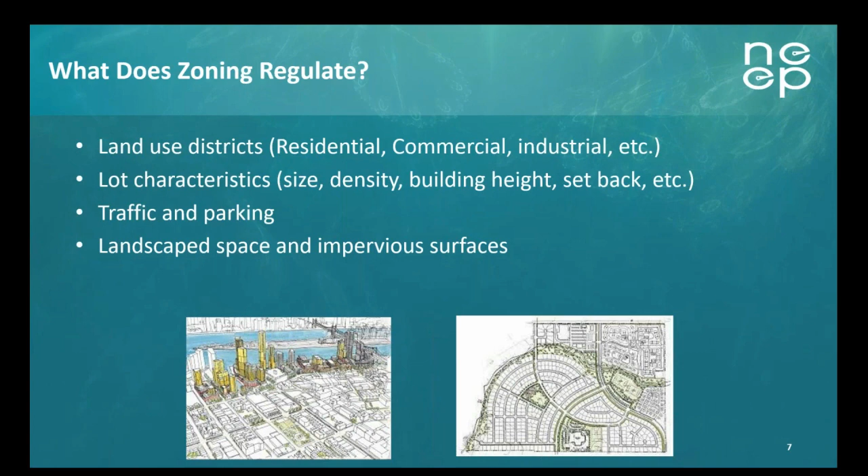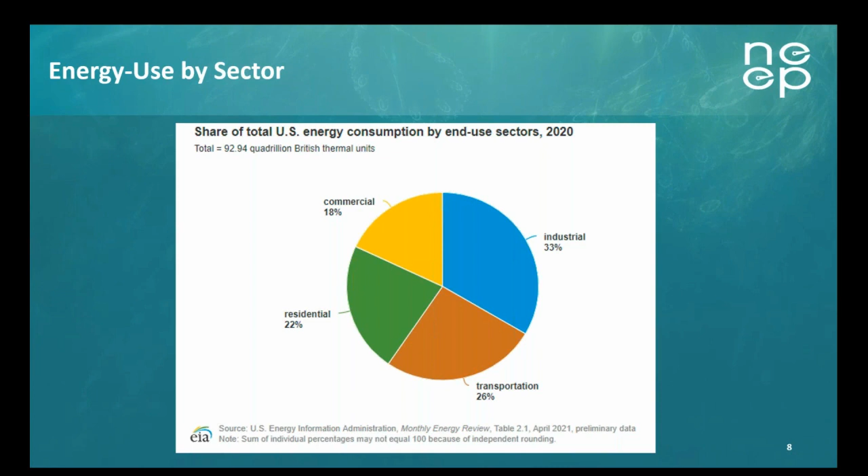So what's the impact of zoning on building energy? Zoning can be used for green space, hardscape, and roof surfaces. In terms of how zoning handles those things, things like urban heat island effect and stormwater management come into play. I'll be getting a little bit more into what urban heat island effect is and how it affects energy as well as people. Next, setback requirements—zoning determines how far the building is set back from the street. In terms of how that affects building energy, building insulation is a factor within the setback, as well as passive solar. The overhang of the roof and how much that counts towards the setback also play a role in the building's energy.

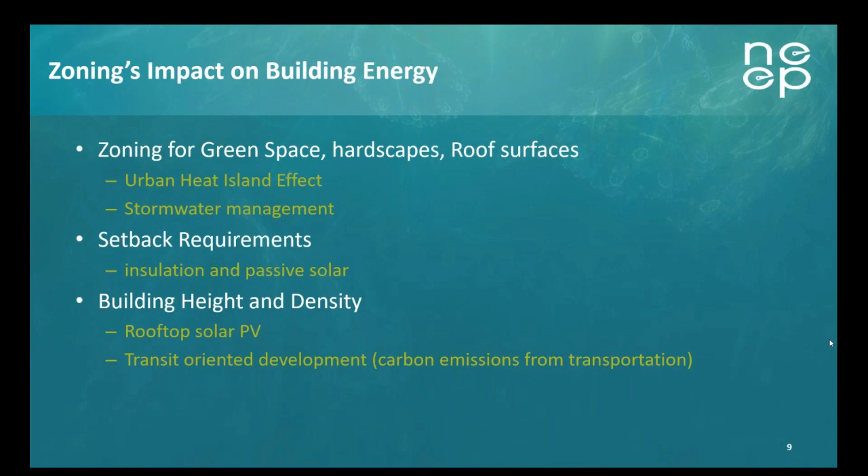And finally, the building height and density. Rooftop solar is a huge consideration for building height. In places where zoning doesn't take solar into consideration, the added height because of solar could come into conflict with what's zoned for that district. And finally, density—a lot of districts are looking at transit-oriented development, focusing development around public transportation and other rights-of-way, and understanding that building at a higher density in those areas can reduce people's use of cars, which contribute to carbon emissions from transportation.

So a little bit more about heat island effect. Heat island effect is urban areas where structures are highly concentrated. There's limited greenery, so there's lots of hardscape and dark surfaces that attract heat, become islands, and can create higher temperatures, which have both an effect on people's health, the temperature of that area, as well as the energy used on things like air conditioning.

In areas where there is a high heat island effect, daytime temperatures can range from 1 to 7 degrees higher during the day, and at nighttime 2 to 5 degrees, and that can be exacerbated in areas where there is a higher level of heat island. So thinking of cities like New York and Houston, where there is a higher degree of hardscape, those temperatures can be far higher during daytime hours.

Heat island effects contribute greatly to increased energy consumption through the use of higher needs for air conditioning, which can lead to things like rolling blackouts and brownouts. Cities that are often experiencing acute heat island effects feel that strain on the grid because of more usage of air conditioning.

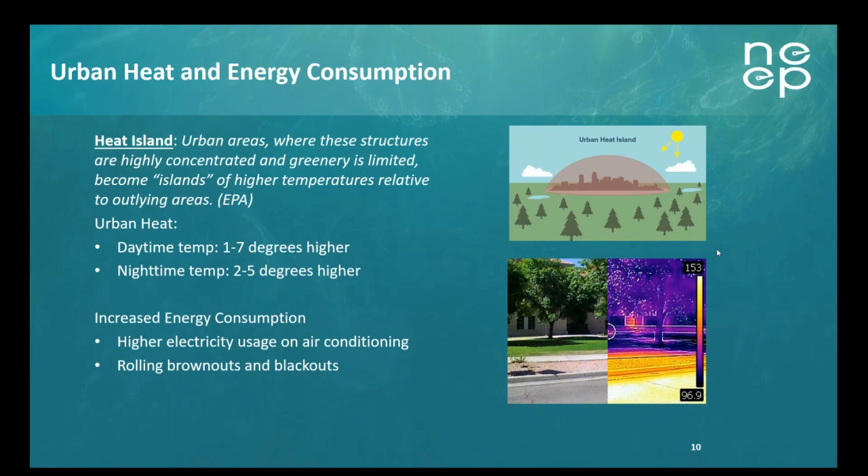Looking at the effect that heat island effects have on people, specifically on low-income communities where older homes are poorly insulated and have weak electrical systems, the added need for air conditioning, having to run it all day, could have a huge strain on those houses. Because they're poorly insulated, they're not holding on to that cool air, and it's causing utility bills to be a lot higher for low-income communities, which puts a strain on them and leads to a higher energy burden.

Next, elderly people and people with health issues are at a higher risk for heat strokes and respiratory distress because of heat island effect. They aren't able to get the same level of comfort and safety in cities where there's higher heat island effect.

And finally, poor air quality, which again has an effect on vulnerable and elderly people. Research has found that redlined areas often have less trees and higher temperatures, and there's a higher ratio of hardscape to green space. So we're talking about redline areas, areas of the city that have been designated and mapped so that specific populations live in one area versus another. I won't get into a lot of that, but it's a consideration, and a lot of research has been done around how redline neighborhoods often coincide with areas that experience higher levels of heat island effect.

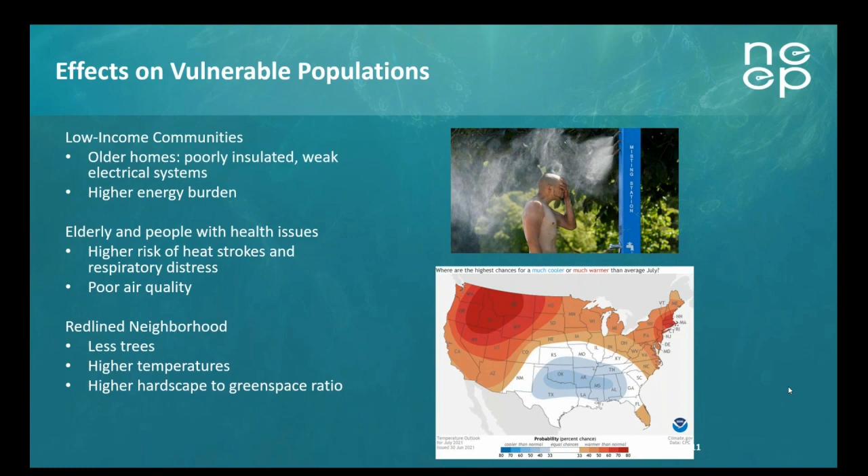Spending a little time providing a few examples of how different cities and municipalities have used zoning to address building energy. Looking at Somerville, they recently did an overhaul of their zoning code and incorporated building energy language into it. One aspect of that was the green score, which uses a similar structure and language as the Seattle Ordinance. The green score is a performance-based environmental landscaping standard that uses a weighted point system that incentivizes different landscape and site design elements. These elements aren't directly connected to energy, but do touch upon it.

The green score touches upon things like reducing stormwater runoff, improving urban air quality, mitigating urban heat island effect and the effect it has on building energy usage, as well as improving the well-being of residents and visitors. In addition to this zoning overhaul, Somerville is also committed to adopting a zero energy stretch code, which is currently being developed in Massachusetts. This is a way in which the zoning in Somerville is trying to work in concert with updates to the building code around energy and really prioritizing that.

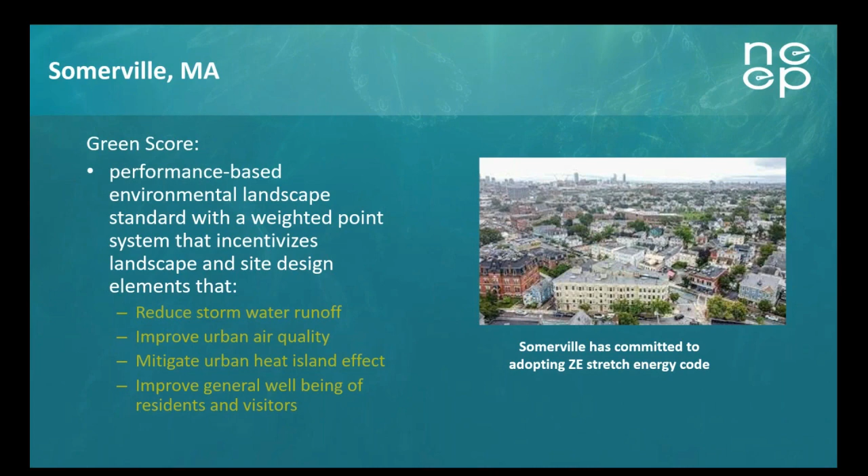Next, Denver. I know Katrina, who will be going after me, will be talking more about this, so I'll just briefly touch upon the Denver Green Building Ordinance and she can go into more depth. In Denver, they passed an ordinance that offers flexible pathways for compliance for green buildings, for new buildings over 25,000 square feet and additions 50,000 square feet and up. One of the requirements is a cool roof.

A roof that reflects sunlight is considered a cool roof, so it's not absorbing that sunlight, which is part of the heat island effect I talked about earlier. It reflects sunlight, which reduces the building's energy load.

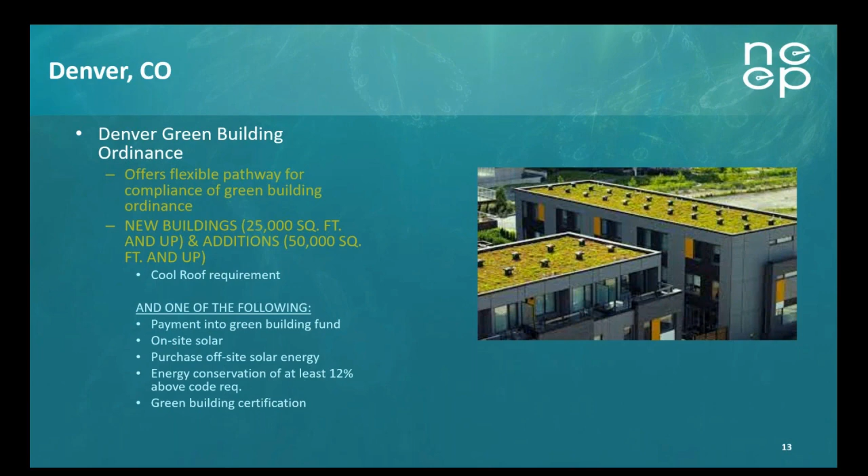In addition to that cool roof requirement, buildings can also comply by following one of the pathways, including payments into a green building fund, on-site solar, purchasing off-site solar energy, reducing or providing energy conservation of at least 12% above code, as well as getting a green building certification like LEED or Passive House.

Next slide. So a few considerations for municipalities that are looking at their zoning and want to try to implement strategies for their zoning to better address building energy.

Think about allowing for building orientation exemptions to maximize daylighting, especially in winter times, ensuring that there is enough daylight getting into the building to lessen the load on lighting.

Promoting covered parking in commercial districts to reduce heat island effect, and in addition to having covered parking, potentially using that covered parking for canopy solar.

Setting a minimum solar reflectance index, or SRI, for the roofs in commercial and industrial districts. Going back to the Denver example, the cool roofs, that's kind of what SRI is for, the solar reflectance index.

Finally, exempting overhangs and exterior wall thickness from counting towards the gross square footage. So really, it's looking at the setback and putting exemptions in there, allowing buildings to have thicker insulation and overhangs to better insulate and make the building tighter and more energy efficient.

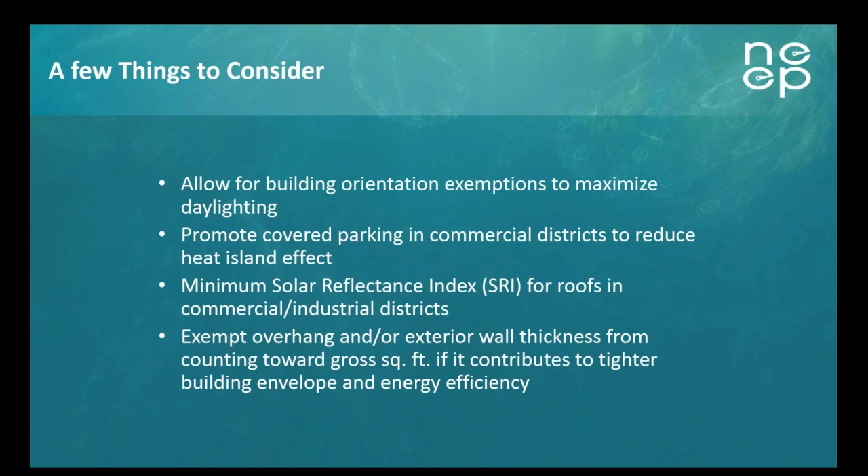I think that is my final slide. So thank you, everybody, and I'm here to answer questions at the end.

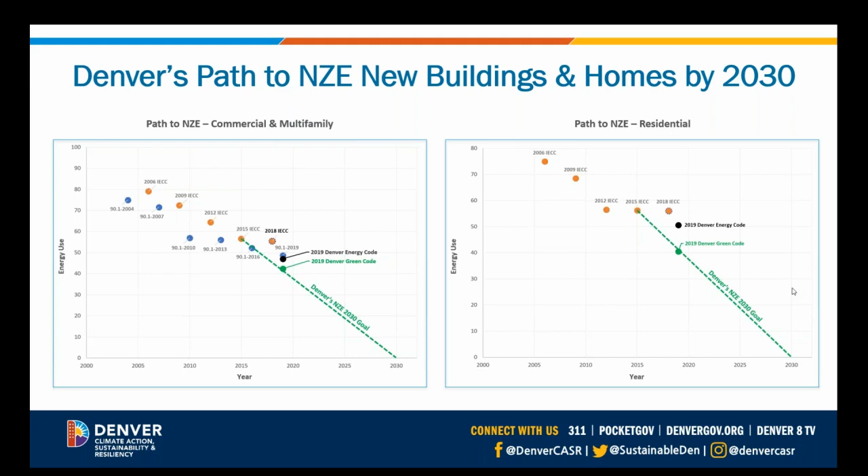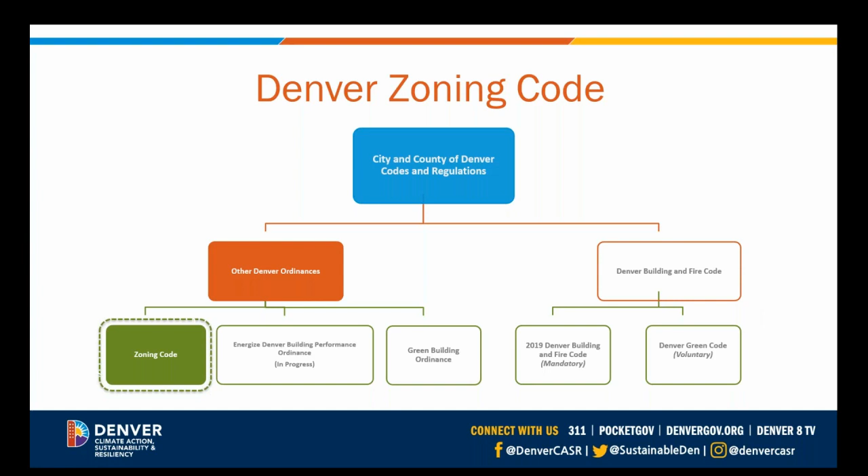So next we'll go into some of what we're starting to consider in the zoning code. Just to center where this is, it's separate from the building code. On the next slide, I'll talk through a bit of what we're really starting to scope in terms of what might be possible in our zoning code.

You heard Kai touch on a bunch of this, but we're looking at things like landscape regulations, which govern what kind of soil volume a tree needs to be given, and what kind of plants need to be planted, because we are in an arid high desert prairie in Denver. That's what comes right up to the mountains, and then the mountains start—they're pretty arid too, but we don't have a lot of water. So how do we make sure people are planting appropriate plants for our climate?

How do we change lot coverage standards, parking requirements? Can we require district energy systems? There's a really cool district energy system being built at our new National Western Center complex.

It's a big complex. The city is collaborating with Colorado State University to run our stock show, but also do lots of agricultural trainings. That whole campus is going to be powered by a waste heat to energy system. They'll be pulling energy from the sewer pipes that run along through the property—it's extra waste heat that was just warming the river after that water was cleaned and dumped back in, and they're converting it into energy on the campus. So how do we get more large developments planning for that kind of district energy system? Some of that sits in zoning, or would sit in zoning.

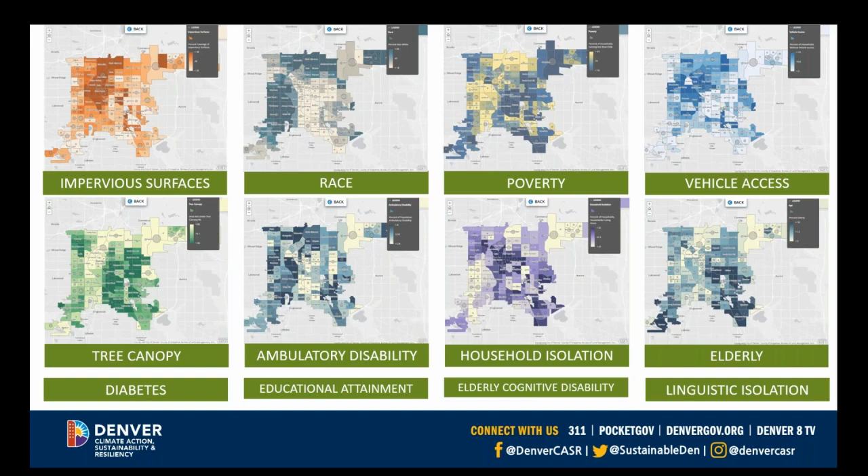And so we know there's a pattern there—if you go to the next slide, you can also see how that same inverted L shows up in our heat vulnerability index. The areas that have the least tree cover, the most people of color, and the most vulnerable populations also have the greatest heat vulnerability.

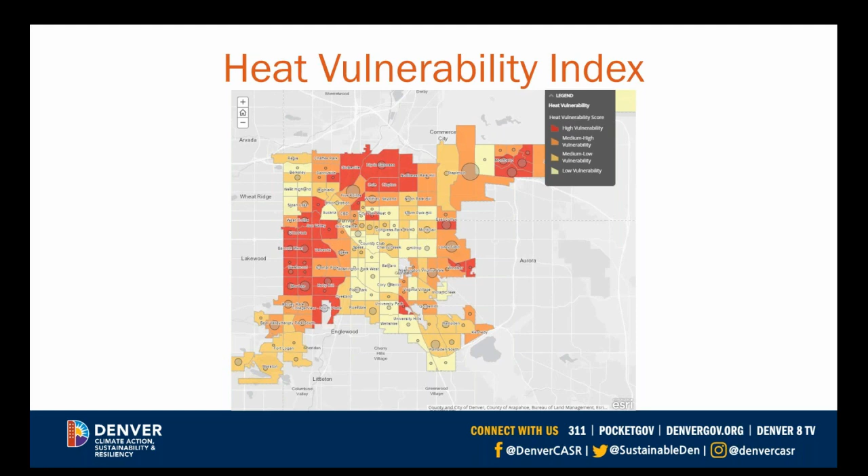So all new developments and all roof replacements are really contributing to the sustainability and resiliency of our city. This was put in place in 2018, so we've got a pretty good track record as it rolls out, with people picking a mix of compliance options across developments citywide. I think the ordinance is working, especially since we add about 2% to our building stock every year—we're growing pretty quickly. As more buildings are built under this ordinance, its impact will grow over time.

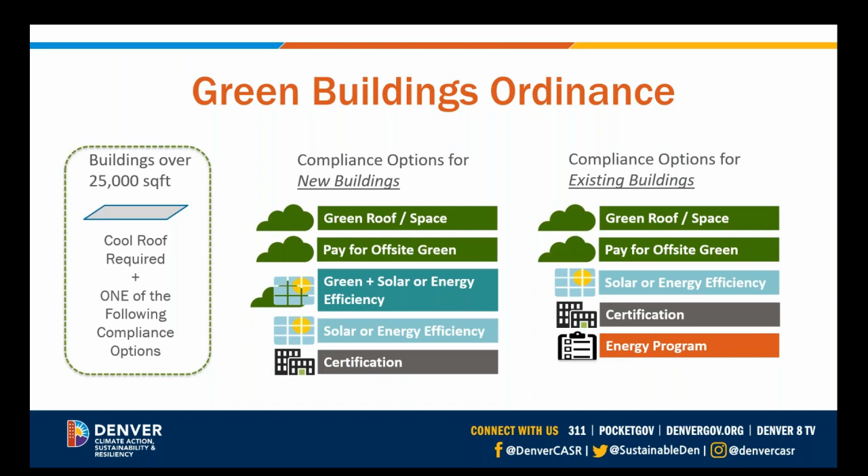Next slide, I'll talk about the Energize Denver task force. This is now returning to existing buildings—that's really the last piece I wanted to cover, because the organizers were interested in how we're starting to contemplate and work on this policy to require higher performance from our existing buildings.

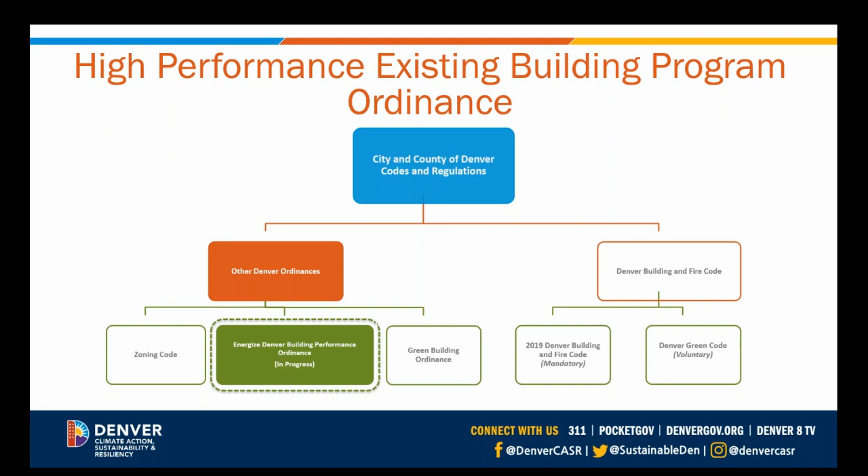If we go to the next slide, we know that 49% of Denver's greenhouse gas emissions come from buildings—commercial and multifamily buildings—and another 15% or so come from homes. So this policy is going to improve the performance of all these existing buildings. The code work I just talked about and the green building ordinance help improve the performance of new buildings, and about half of our building stock will be new by 2050. So let's talk about what we're doing on existing buildings. Next slide.

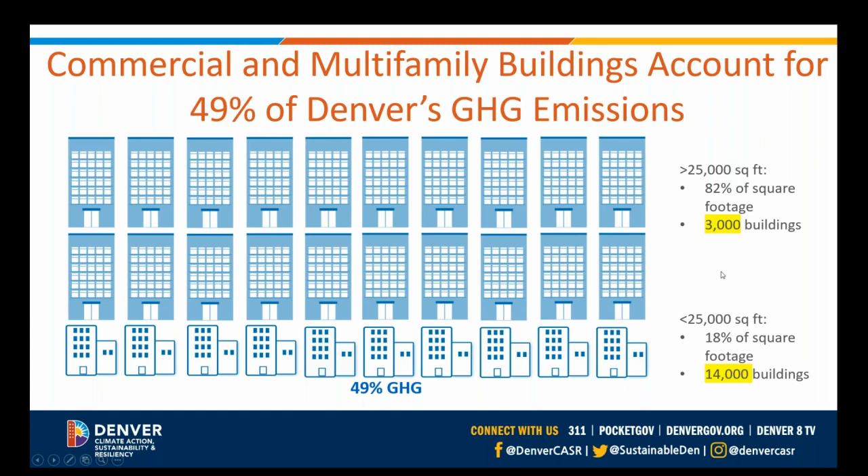We formed the Energized Denver Task Force to help us achieve net zero energy in all of our existing buildings by 2040. On the left you can see the blue electricity carbon emissions, and in yellow the fossil gas or natural gas carbon emissions in 2020 from all our commercial and multifamily buildings. The open bars are really what we charged the task force with figuring out how to meet.

The task force included really diverse stakeholders: folks from across our real estate sector, building owners and managers, hotels, apartments, condos—all our biggest building types—as well as affordable housing providers, nonprofit and tenant representatives, our local utility, oil and gas and energy providers, clean energy advocates, environmental groups, and building energy experts. We challenged those 25 diverse people to come to consensus about how to regulate the open bars.

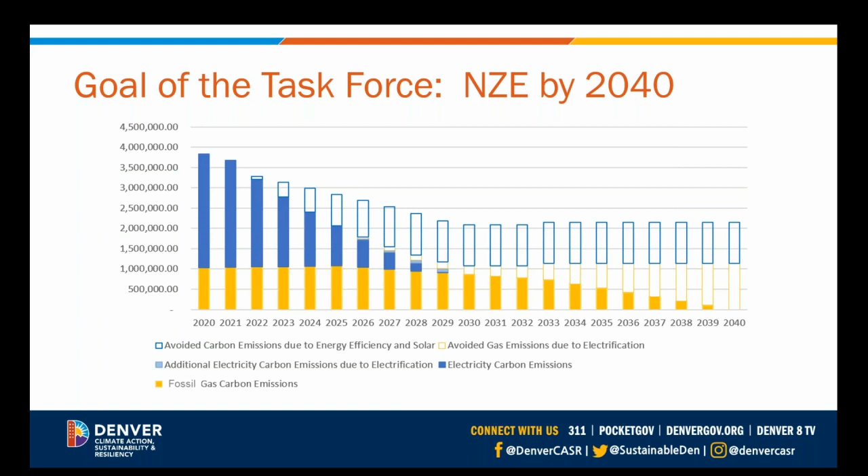How do we require our buildings to be at net zero by 2040? If you go to the next slide, you can see what we charged them with and what they came up with. So what they have recommended to us, we will be bringing an ordinance that reflects this to City Council for their consideration on November 3rd.

What they have recommended to us is that we require a 30% improvement in energy performance for all existing buildings by 2030, and every building will have its own trajectory. Here's an example of how this will work for offices. All offices would have a target energy use intensity of 50, which is how much energy is used per square foot by 2030.

Office A uses a lot more energy today than Office C. It has 100 kBTUs used per square foot every year, and Office C only uses 60. They're much closer to the final target. So every single building will have its own line or trajectory drawn to get to the same final target. They will have binding interim targets in 2024 and 2027, so that no one has to save an unachievable amount in any one year. They have a glide path to that final target.

15% of buildings, and 15% of offices in this case, are already better than that final target. That's what it takes to save 30% across all buildings - everyone has to be as good as that top 15% of buildings today. So this will be one requirement that we'll be bringing to City Council for approval. It will be in committee on November 3rd, hopefully passage through council in November.

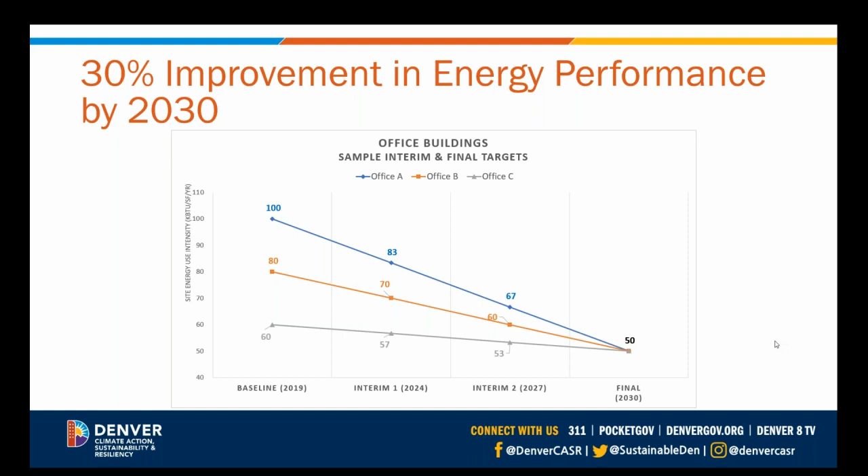The second requirement, which I think was really of interest to this group, is a little more tied - if we go to the next slide, you can see what the task force has recommended regarding renewable heating and cooling. Moving from natural gas space and water heat to electric space and water heat is a critical climate strategy. If we're going to have zero emissions in buildings, we have to stop burning natural gas. And if we're going to have zero emissions as a city, we have to stop burning natural gas in our buildings. Our grid will be 80% renewable in 2030.

Our local utility, Xcel Energy, is required to reach that target. They will be carbon free in 2050. So the grid has capacity to move to renewable heating. We are looking at how we help buildings meet those performance targets you just heard about, and really make sure that all buildings are moving off of gas for space and water heat when it's cost effective, when they're already replacing their systems.

We have a whole renewable heating and cooling plan - you can find that easily if you Google it. It looks at how to electrify all the homes and buildings in Denver and the cost to do that by system type. There's a lot, even in Denver, which is a heating dominated climate - it gets cold here in the winter. It is cost effective and at cost parity or near cost parity to move to a heat pump for space and water heat in most system types, and often to be at or near cost parity today, we do need to keep gas backup for those very coldest days.

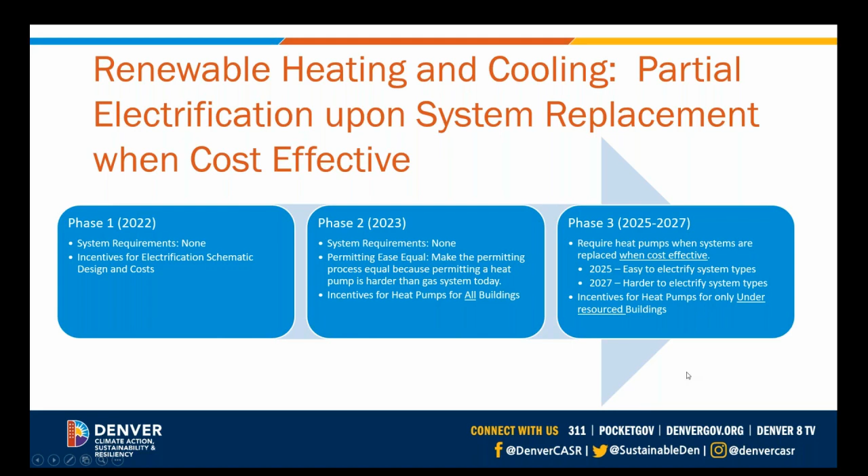I'll show you the climate benefits that result from these task force recommendations. The goal, in terms of cumulative carbon emission reductions, was 13.7 million tons of CO2 saved. And the cumulative benefit of the policies the task force recommended were 11.8 million tons of CO2 saved. While this doesn't achieve the task force goal, it does get about 80% of the way there, and I think that's a pretty tremendous step forward to cut greenhouse gas emissions by 80% in all of our existing buildings in Denver by 2040.

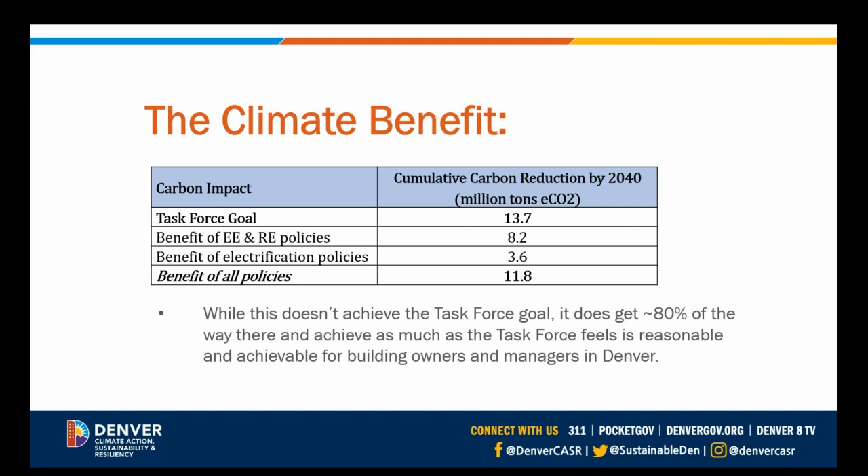We are told by the task force to reevaluate the regulations and the technology every 4 years, so we hope as technology advances, we can do more over time. Thank you all so much for your time and interest. We can go to the last slide and move on to the next speaker. Happy to take questions.

Thank you, Katrina. I should say your mention of open bars made me think of strong beverages personally.

But it's great to see the confluence of multiple policies and regulatory types being employed or planned to be employed in Denver. Let's move on to Ellen to get a view from Alexandria, Virginia.

Hi, thank you for having me. I'm sorry you can't see me. My web camera decided not to connect with this platform today, but I am here.

I want to say that there's a direct connection between building codes, zoning and land use regulations, climate policies, and equity issues. First, a reminder that building codes are a minimum performance and construction code. Communities can put in place programs and policies that prioritize some environmental issues and advance the city's goals and targets. There are always choices to be made.

Green building policies are one method jurisdictions use to make buildings more energy efficient than the minimum required building codes. The green building policy in the city of Alexandria has priority points on energy efficiency, renewable energy, water efficiency, and air quality. The state and city stormwater regulations significantly affect land use and zoning approval.

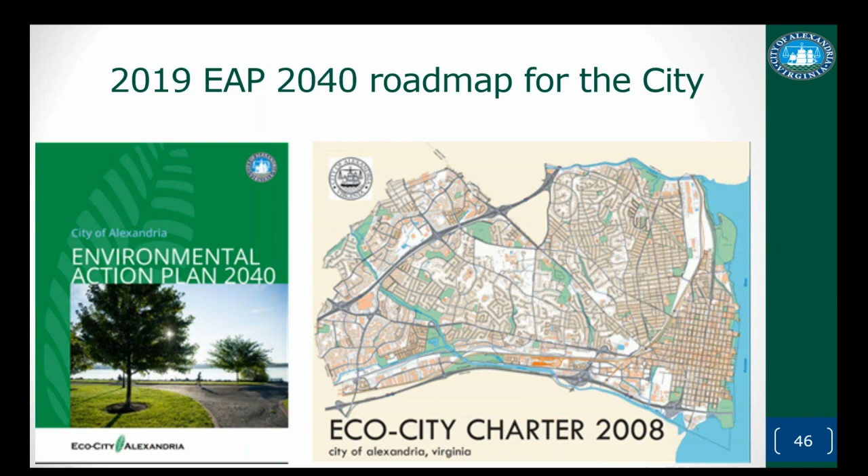Now, unlike Denver, Virginia is a Dillon Rule state. That means it's just like the opposite of a home rule state. The city has the authority to write land use and zoning ordinance, but cannot change the building code, and that includes the energy code of the building code. But our green building policy allows the city to advance city goals and targets beyond the building code.

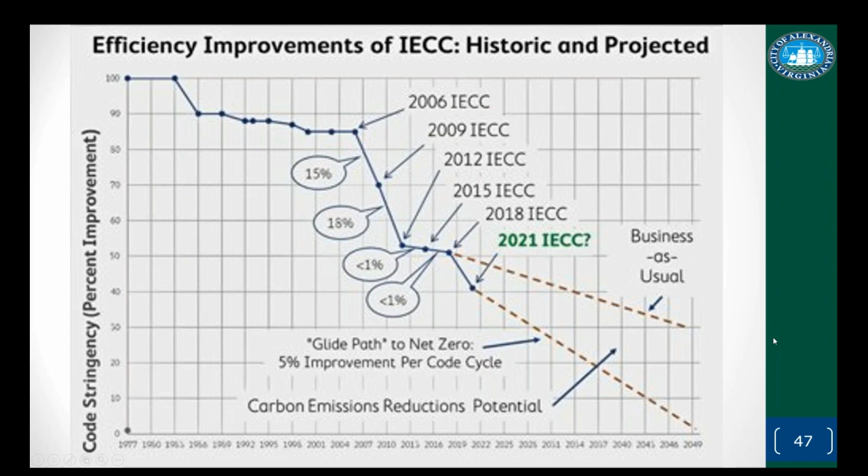As we do code development of the energy code, that process has included things that actually didn't get into the most recently approved model code, which was the 2021 code. The chart on the previous slide showed a question mark of where the 2021 code was going, because that was not clear at the time the chart was made and was decided much later.

Electric vehicles and solar infrastructure were included as part of the 2021 model code, but they were taken out by the International Code Council Board of Directors, and changes were also made to the code development process. So states and municipalities still have the options of moving forward sustainable goals and targets through other options, like the land development and zoning process. Municipalities have that option, and green building policies in cities are part of that option.

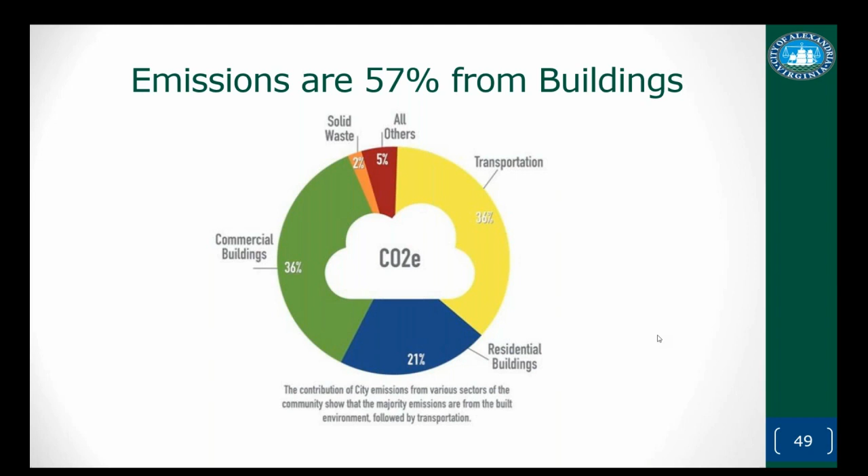New buildings through the zoning development process have been complying with our green building policy since 2009 and are more efficient than our older buildings. So new buildings go beyond that minimum energy code. There has not been the same focus on existing buildings that do not come under the zoning and land use policy process. Most new buildings fall under that development process as commercial buildings, and commercial buildings include multifamily buildings—any building with more than 2 dwelling units has to comply with the commercial codes.

In the city of Alexandria, multifamily is 65% of housing. That is probably not similar to other more suburban or rural communities. So here multifamily is really a majority of our housing. Zoning and land use regulations and our limited available space in our 15 square mile city result in this pattern of housing stock. This also means our housing unit size is smaller in the city of Alexandria—40% of our housing is in buildings with more than 19 units.

A relationship between the increase in energy efficiency in the building code is much more complex than just this discussion, and should be evaluated by the Department of Energy and others. It is bigger than any one city.

One purpose of land use and zoning in Alexandria is to increase the amount of affordable housing. Every housing unit is heated and cooled, and we have in our region a more balanced heating and cooling season—we're more like 50-50. But the energy burden directly or indirectly affects tenants or owners based on their income profile. Energy burden is a percent of income spent on utility bills. So energy bills are a substantial component of housing costs, and therefore energy burden affects housing affordability for low and moderate income households.

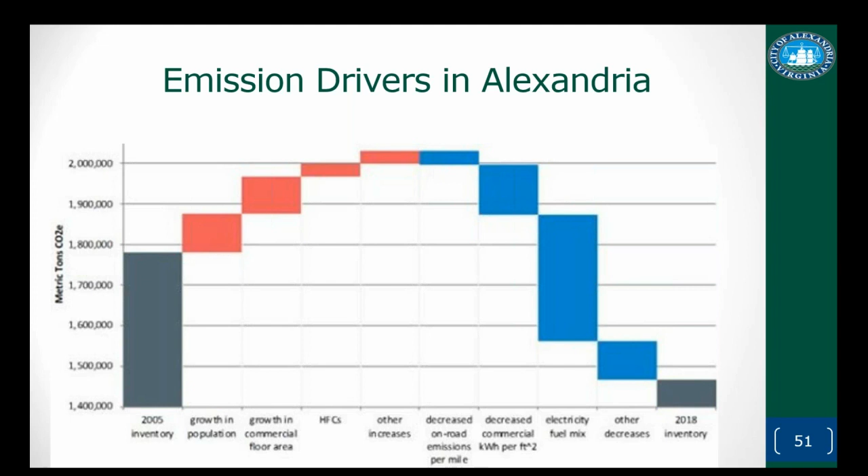Energy burden by income: energy burden is higher on low-income residents. Low-income residents' energy burden is more than 3 times that of moderate income households and 7 times more than higher income households.

But energy burden is also affected by age and applicable building codes and green building policies in place at the time of construction. Most of the buildings in the region were built prior to the adoption of updated codes and green building policies, and older, less efficient buildings contribute to this energy burden. Next slide.

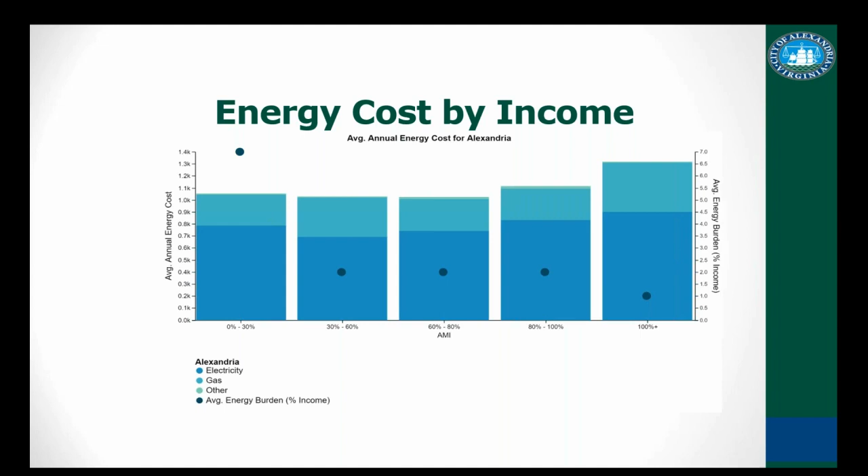So, improving existing buildings: land use and zoning policies result in increased energy efficiency in buildings and can go beyond minimum energy codes, contributing to our climate goals. Energy codes have only been minimally applied to existing buildings, and in Virginia they most often only apply to roof replacement and insulation. We have a whole code just called the existing building code, but applying new energy codes to existing building renovations could improve building energy efficiency.

Climate mitigation cannot wait for the slow pace of national and state building codes to help municipalities achieve sustainability goals. Green building policies in the land development process are how communities are demonstrating their desire to implement code changes now to mitigate climate change and work towards our own goals and targets and the Paris Agreement that many of us have signed on to support.

The building plan review process for Virginia right now enforces only the minimum energy code. It's the zoning and the green building policies that allow us to go beyond the minimum code. So right now, more efficient design features under a zoning development process and that green building policy are more of a negotiated process that pushes sustainability, but we really need to move these national and state codes to improve for existing buildings.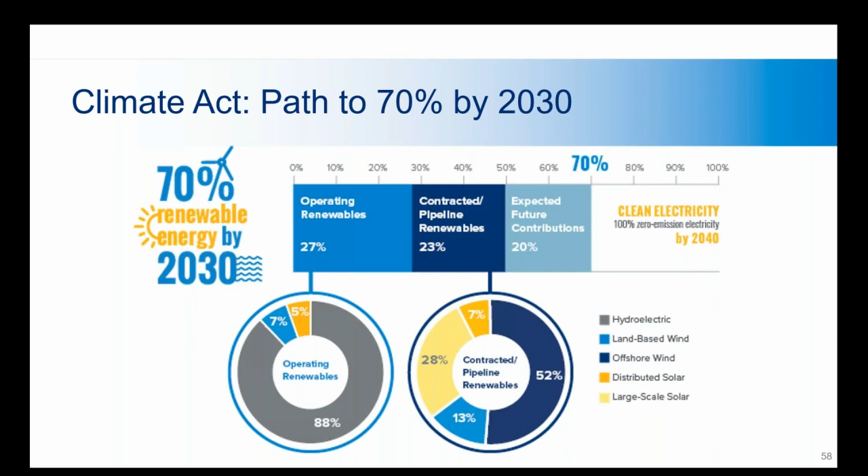Again, focusing on these three technologies for the most part. All of them have considerations that local governments are concerned about: location, where to put them, any potential impacts they might have on the environment, how much space they take up, decommissioning - what do we do with these things when they reach the end of their useful life - and how do we tax them, or maybe not tax them.

Solar in particular has visual impacts that folks are concerned about. Maybe they don't want it ruining their scenic view sheds. Maybe they're concerned it might be taking up valuable agricultural land. These are the sorts of things we help them deal with.

Similarly, wind has those same visual impacts that need to be dealt with, along with noise and also perhaps shadow flicker from the spinning turbines. And then finally, energy storage - a lot of folks are concerned, rightfully so, about fire safety, and to that end, incident management training for local fire departments.

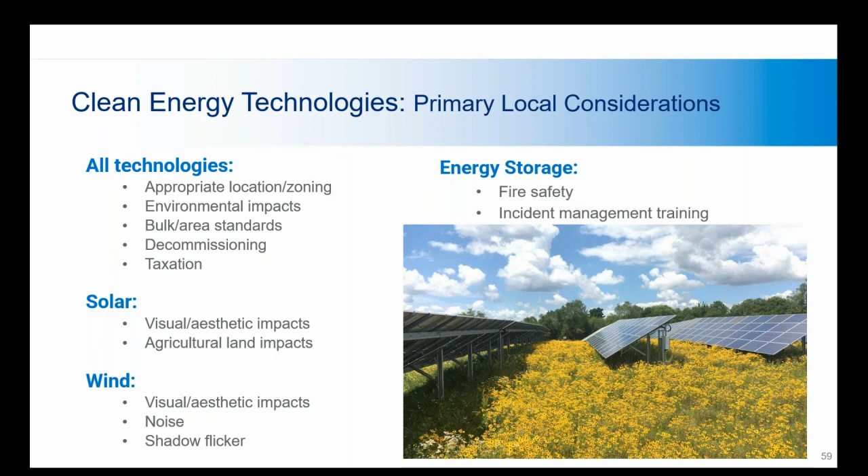All of these issues we've tried to address in our guidebooks, which are a work in progress.

So we address that through our guidebooks, but we also offer one-on-one technical assistance to any municipality in the state, or also other local stakeholders. We don't discriminate - you don't have to be a local government official to work with our team. It's all free. We're basically like free state consultants, if you will, to help local governments prepare for clean energy.

We'll also do trainings, like bigger, more formal group trainings. We have resources related to zoning and permitting, property taxes, the state environmental quality review process. There's a chapter in our solar guidebook on municipal procurement for renewable energy, and so on.

Right at the bottom of that slide, again, all of this is posted on our website. It's just nyserda.ny.gov/siting - pretty easy to remember.

If you do go there, this is sort of what the homepage looks like. All the resources are over on the left-hand side of the screen; over on the right, our email contact, a spot where municipalities can request that one-on-one technical assistance I mentioned before. Anyone listening is also free to hit us up - even if you're not in New York, we're happy to have conversations with anyone.

Just a little overview of how renewable energy is permitted in New York. Essentially, larger systems are permitted at the state level and smaller systems are permitted locally. So for solar and wind, anything larger than 25 megawatts is permitted at the state level through our Office of Renewable Energy Siting, which is a separate entity from NYSERDA - it's important we keep these things separate. For projects under 25 megawatts, they're permitted locally. And there's this weird thing where projects between 20 and 25 megawatts of generation can opt in to the state level process if they want, or choose to be permitted locally.

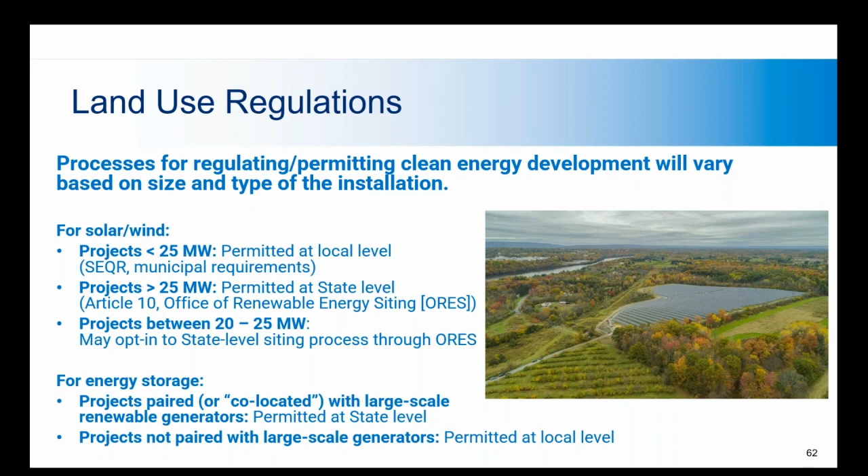Land use regulations and zoning are really important for local governments. They want to make sure all these systems are placed in their communities in a spot that they'll be happy with. A lot of them have never encountered this scale of development before and don't know how to handle it. That's where our team comes in, trying to take the guesswork out of it and help get them started.

To that end, we've created guidebooks for each of the technologies for local government officials. Particularly in the solar and storage guidebooks, the most important piece, I'd say, is our model zoning laws that are in there to get folks started.

I'm going to give you a really brief overview of what's included in those. It would take hours to go through all of it, so it's going to be fast, and we'll have plenty of time for questions at the end.

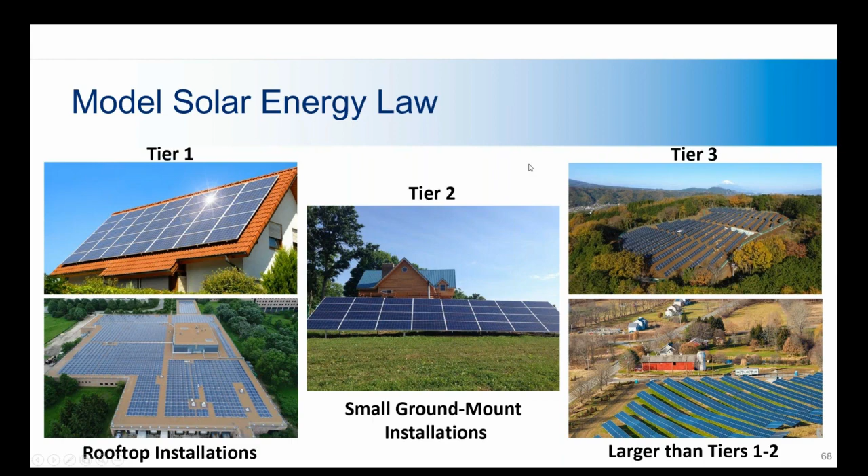For those that may not be familiar, we've divided our law into three tiers: tier 1 being rooftop installations, tier 2 being smaller ground mount installations, and tier 3 being everything else bigger that doesn't fit into those two buckets. As you can imagine, the regulations we recommend local governments adopt get more stringent as you move up through the tiers.

For tier 1 and tier 2 systems, building mounted or building integrated and small ground mounted ones, we recommend they simply be permitted with a typical building permit at the local level, and also with our New York State Unified Solar Permit, which isn't mandatory but we created and encouraged folks to adopt. At one point we even put grant money behind it to get communities to adopt it. Hundreds have, and it helps developers and communities alike know how to deal with smaller systems and get them permitted in a streamlined way.

For larger tier 3 systems, the law goes into a lot more detail. We recommend local governments use a special use permit and a site plan review, so you're really looking at them in a more customized way.

Some of the permitting requirements for tier 3 systems that we recommend in the law are totally customizable as local governments see fit. We outline requirements for burying wires underground to the extent possible, how wide vehicular paths into the site should be, what signage you want or don't want, fencing, lighting, whether to cut trees, and requirements for decommissioning at the end of the system's useful life. Section 8 outlines what should be included in a site plan application and special use permit standards, so we're really trying to cover all of the ground here.

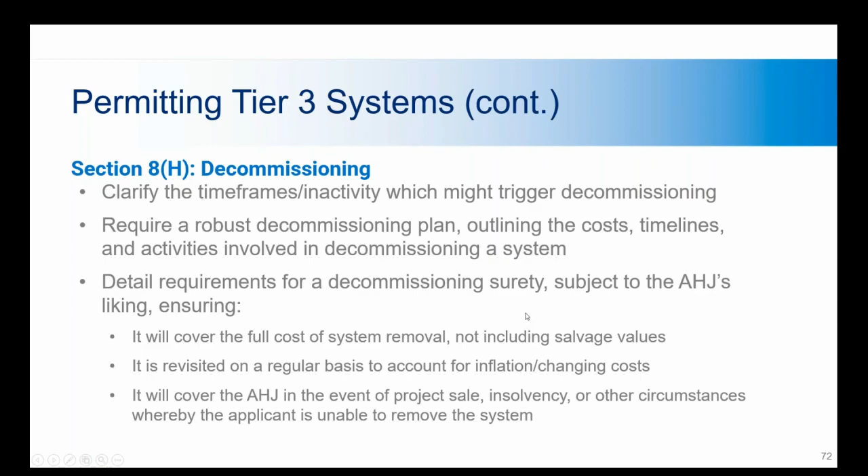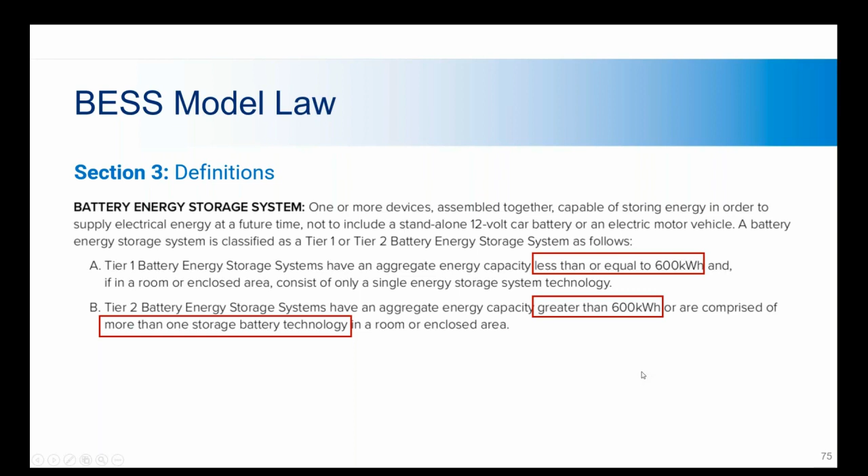Those boilerplate sections I'm not going to go through, but if you zoom in on sections 6 and 7, it's the permitting requirements for tier 1 and tier 2, as we define them, battery energy storage systems. Much like solar, tier 1 are the smaller systems - we've made the cutoff at 600 kilowatt hours, so think residential up to maybe a small commercial building system in their basement. Tier 2 is everything bigger than that, or systems mixing battery types, because they create increased safety concerns. That's how we've split up our energy storage law.

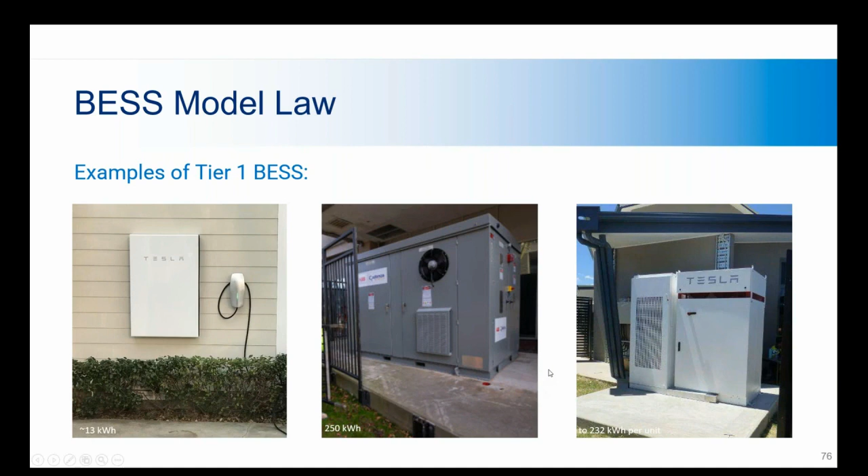Just a couple examples for visualization. Tier 1 systems - you can see a residential system on the left, and a couple small commercial size systems, maybe the size of a refrigerator or a couple refrigerators. The Tesla one over there on the left, perhaps a large suitcase hanging on the wall of someone's home.

For the smaller ones, we recommend that communities adopt the battery energy storage permit, another one of those streamlined statewide things we've developed for them, to streamline the permitting process for smaller systems. It's voluntary, but we recommend it. We also recommend exempting those smaller systems from site plan review and allowing them in every zoning district.

For the larger systems, much like solar: special use permit, site plan review, and specifically outlining where a community would want them - designating zoning districts where they would be allowed.

So in there we outlined some requirements for approval. All of these sections go into much more detail in the model law, but I want to highlight what's included: things like burying utility lines, signage, only necessary lighting for safety, when you should and should not cut trees, what kind of vegetation is safe around an energy storage system, limitations on noise, again decommissioning - one of our favorite things, what do you do at the end of useful life - and recommendations for what to include in site plan application and special use permit standards.

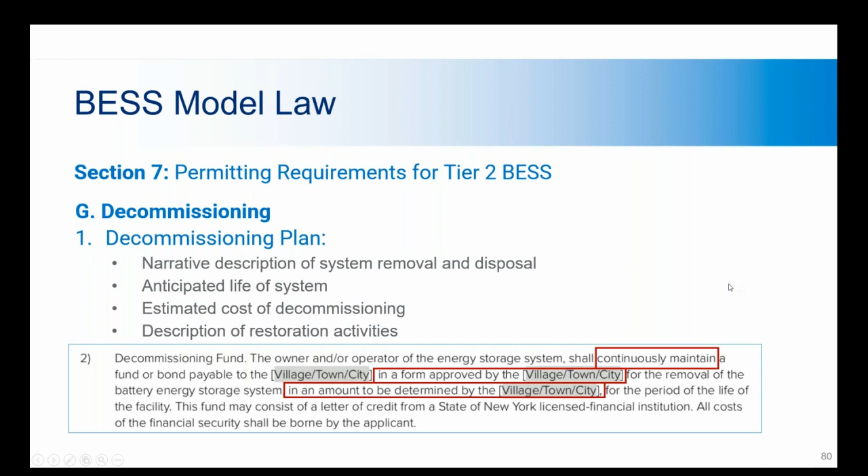A lot of folks are concerned about the fire safety of these systems. New York happens to have one of the most stringent fire codes in the country for energy storage. We adopted it temporarily in 2019, and it became official code in 2020. It's based on the 2018 International Fire Code. So we feel pretty confident that systems going in now are safe, but there's always a chance of something happening.